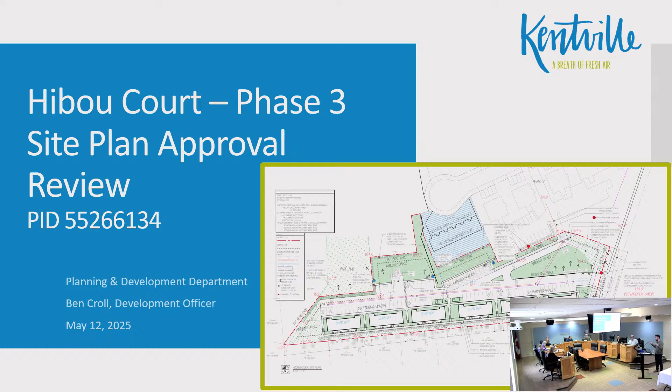Hi, council, mayor, and everyone who attended. A quick introduction, my name is Ben. I'm one of the development officers for the town of Kentville, and I was the one who approved this site plan approval. I'm here to give a presentation on that review process, the regulations, criteria, and everything that allowed me to say yes. There was a report that I created as well that is much more detailed than what this presentation will be, so I do resort to that report a little bit in this presentation. But by the end of this presentation, you should still have an overview on why and how I approved this site plan. First and foremost, where is it?

I have it in the dotted thicker border that has phase 3 and the PID. There is no civic address, so that's why only the PID is provided. The subject property, as I'm going to call it, is 2 acres, and it is currently vacant, so there's no building on it, it's not being used. It is zoned medium density, which is the R3 zone.

Surrounding land uses: to the south, it borders all of the houses off of Mountain View, which are R1, and there's that one R2 lot. To the north is the existing Hibou Court development, phase 1 and phase 2. Phase 1 have little arrows, those are the townhouses, and phase 2 were the apartment buildings. So those are the 2 phases, and this is for phase 3. But apart from that, on the other side of Mee Road, since this property fronts Mee Road, there is Charles Road, and there's a couple of multi-unit dwellings on that road, and there's the Kingstec campus as well. So there's quite a few different uses around the property.

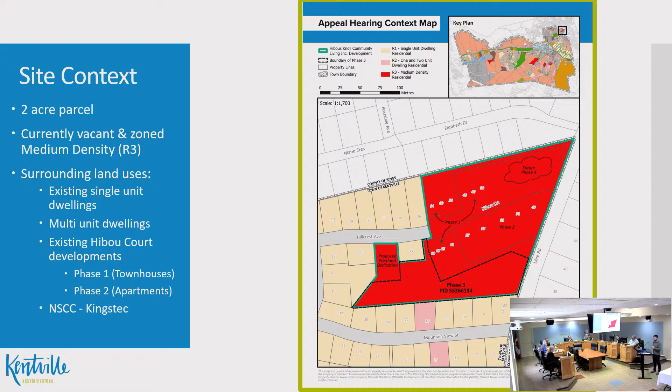The proposal itself, the development, this site plan was to approve 6 8-unit apartment buildings. Each apartment building will be divided in half, so 4 bachelor units and 4 2-bedroom units. In total, we have 48 proposed units, where half, 24, will be bachelor units, and the other half will be 2-bedroom units. This development must proceed through a site plan approval.

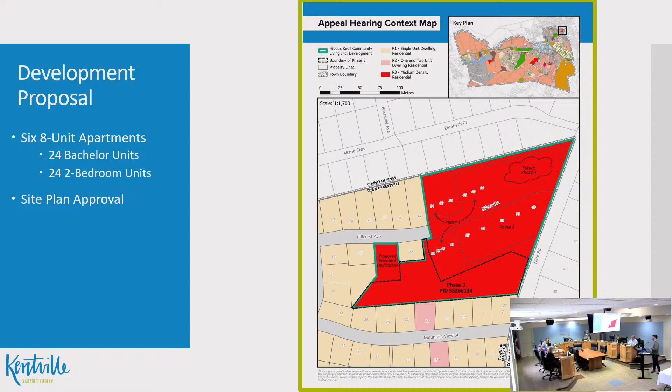However, in order to go into a site plan approval, there needs to be the language and the enabling policy to do so, which is where policy GD30 from the municipal planning strategy comes into play. It reads: it shall be the intention of council to empower the development officer to negotiate a site plan approval as per the MGA for the development or redevelopment of a lot for the following uses. There's A, B, C, and D, but only A applies: new structures in the R3 zone when such developments abut the R1 or R2. And as I showed previously, it does. So therefore, site plan approval.

In the land use bylaw, the LUB, section 5.4.3, in the R3 zone, the following uses shall be permitted by a site plan approval, and B is the one that matters: multi-unit dwellings up to 8 units. That's why it's 6 8-units and not one 48-unit apartment building, because in that zone, you can go only up to 8 units per building.

So there's the where, the what, and how we were able to get into the site plan approval. Now let's go into the review.

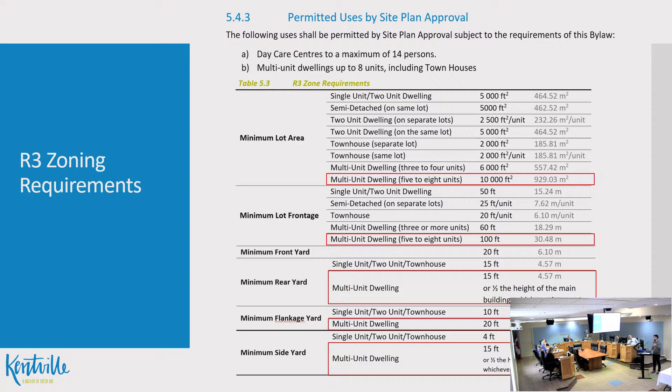First, is it a permitted use? As I just mentioned, multi-unit dwellings up to 8 units through a site plan. Check. So knowing that it's a multi-unit dwelling up to 8 units, then you just need to follow the 8-unit criteria and not the townhouse or single unit criteria. So when reviewing this site plan, we have to make sure that all this complies.

So let's go to the site plan itself. There's a lot here, I'll break it down. But the important thing to know right away is that red line is the property boundary. Further in, there's a gray dotted line, and that is the setback line. Anything within that is the developable land. Anything past, no building can be there. It has to go at least past the setback boundary. That's all I'll say for now, and then we'll dive into the different components here.

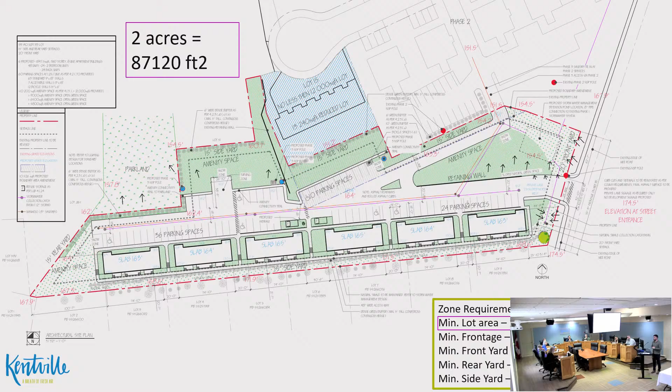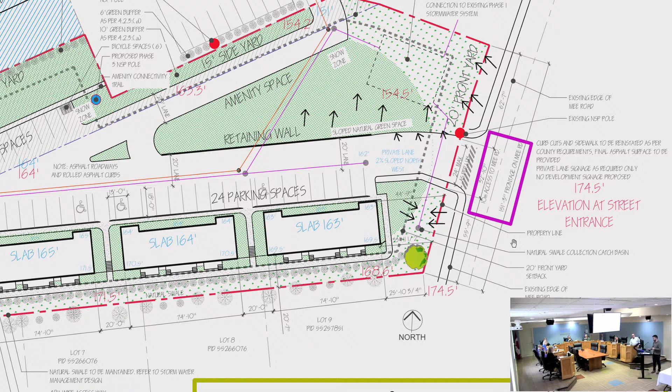So we know it's in the R3 zone, and it has to follow the 8-unit dwelling requirements. For that, we need a lot that is minimally 10,000 square feet. As mentioned, the property is 2 acres, so almost 90,000 square feet. Check. Frontage, that is hard to see, but I learned that you can actually zoom in, which is pretty cool. So 151 right here, and again minimum is 100. So check. Front yard setback.

Front yard setback is, you have to find your frontage. The frontage is off of Mee Road, so 20 feet from that property line. And that is how we got this setback boundary. No building is within that.

Perfect. Rear is the furthest line from your front property line, which is this. The rear yard setback is 15 feet. No building is there, that is met. Every other property line is considered a side property line, so you have another 15-foot setback, and again no building is within that.

So that is the zoning requirements. However, there are other regulations of the land use bylaw that also need to be met. First one, section 4.1.19, this allows more than one main building on the lot. Here we have 6. The requirement is that the minimum distance between the buildings must be a minimum of 20 feet in this case.

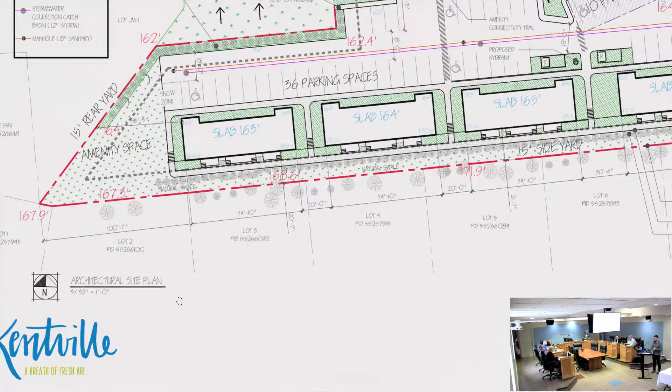So I can zoom in if you want again because it's fun. But here you go, so that's what this 20 foot is. So it clearly indicates on the site plan that that requirement is being met.

Next, amenity space. Whenever a development has 4 or more units, it must meet section 4.1.3. Again, in that report I had more of a breakdown, but in summary, you need 4,800 square feet for the bachelor, 5,400 square feet for the 2 units, so a total minimum of 10,200 square feet. This site plan actually provides more than double that, at 21,000 square feet, which has a little breakdown on the site plan in the top left corner. But all that to say, pretty much everything you see in green is considered amenity space, and it was provided, so check.

Parking. Parking is a bit of a beast on its own, it would take me 30 minutes just to go through all that. So the important item here is understanding the calculation. This is table 4.2 of the land use bylaw, and the second item, multi-unit dwellings that consist of greater than 4 dwelling units, needs 1.25 parking spaces per dwelling unit. There's 48 dwelling units being proposed, so 48 times 1.25 equals 60. Exactly 60 parking spaces are being provided, so check.

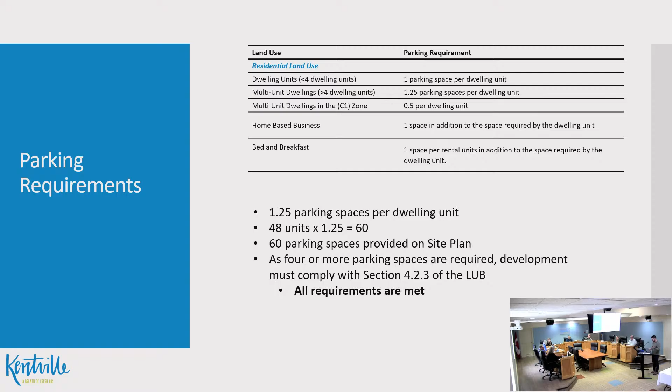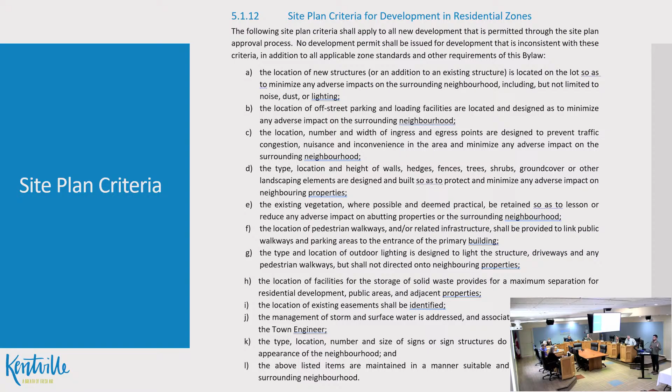So that is the LUB requirements and standards. Now let's go into the site plan criteria.

So the first one: the location of new structures is located on the lot so as to minimize any adverse impacts on the surrounding neighborhood, including but not limited to noise, dust, or lighting.

This is, as a DO, sort of the last one I check, because all the criteria are implemented to reduce the impact on the neighbors. Once you figure all that out, we know the lighting is good, we're dealing with dust, stormwater management, and setbacks. Then I can confidently say all reduction of impact on neighbors is met, and I can approve this. So this is the last one I usually check off.

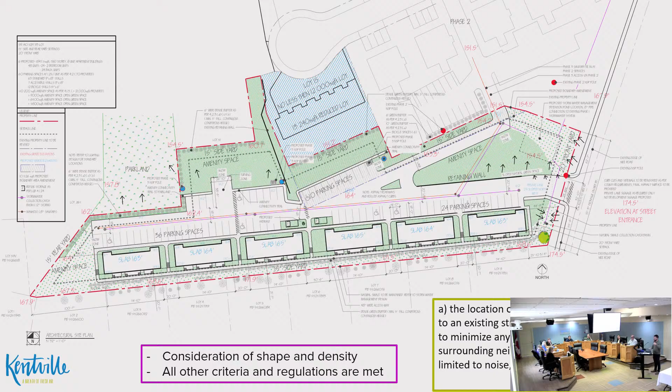However, for the sake of this presentation, considering that the lot is very oddly shaped and it is a medium density zone, so we want to meet that medium density. Considering the shape, the density, and that all other criteria were met, check.

The second one: the location of off-street parking and loading facilities are located and designed so as to minimize any adverse impact on the surrounding neighborhood. This was reviewed with Traffic Authority, and that was attached to the report. There was a memo stating that they reviewed and approved this as well.

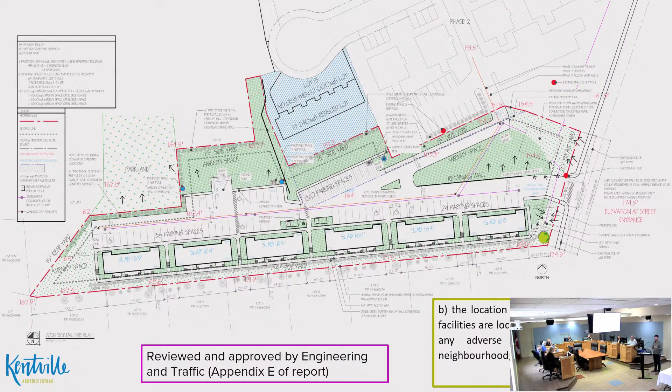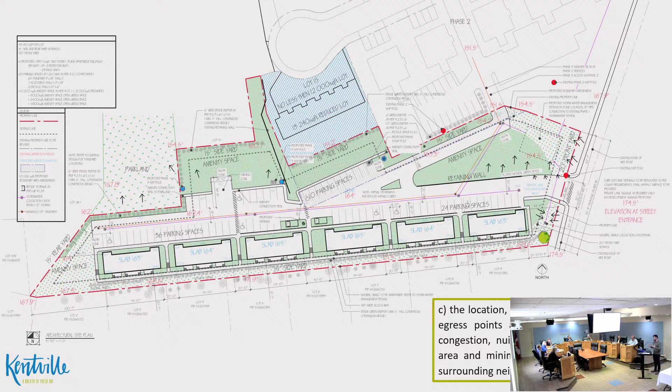Third item: the location, number, and width of ingress and egress points are designed to prevent traffic congestion, nuisance, and inconvenience in the area and minimize any adverse impact on the surrounding neighborhood. Here's an example of one of the different versions. I think there were, I honestly forgot, 4 or 5 different versions.

Ultimately, when the application first came in, the main access was off of Ibu Court, and then there would have been an emergency access off of Mee Road. That did not meet standard, because if there was an emergency, emergency vehicles need quick access. These are going to be rentals, so there will be moving trucks all the time. So we needed a main access off of Mee Road.

Obviously there had been some redesigns, all that stuff. But ultimately, through several conversations with the DO, the different directors, and the applicant -- actually, now that I'm thinking about it, Me Road is a provincial road, it's not within the town. So once we knew we were going to have the main egress off of Mee Road, we actually had to require or get a permit from the province to approve that entrance. That has been issued, so we do have the permit from the province. So with all those conversations, ultimately it was reviewed and approved by traffic.

D, this is buffering -- these are just fancy ways of saying buffering. Another example of a review and different revisions. Towards the end, I'm pleased to show that there is now buffering all along. That was not the case when it was first submitted.

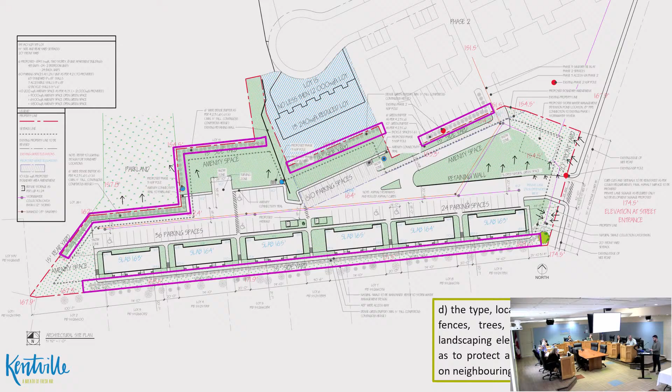So what it came down to is a dense green buffer, and I was very pleased with the word dense, because dense just means that you look at it and you can't really see through it. So whatever combination of shrubs or trees or whatnot, doesn't matter, but as long as it's dense, you look at it and think, okay, yeah, that is blocking light, blocking visual aspects, and that helps with noise and all that as well.

However, that's still not enough, because they can just plant everything, we take a picture, it's like yeah that's dense, but then all the trees die next year -- well that's not really helpful. So we also have the ability to put language in an LOU, a letter of undertaking. A letter of undertaking is the agreement that the town and the applicant will sign, and it's actually registered to the property. So once you look at this property, that letter of undertaking is there, and we will put language in that letter to say that buffer needs to be continuously maintained. You can't just plant it once and let go of it; there has to be a continuous dense green buffer.

There were conversations about putting up a fence and whatnot, but just because of the landscape and all that, the green buffer was the way to go. And of course, nature -- thumbs up.

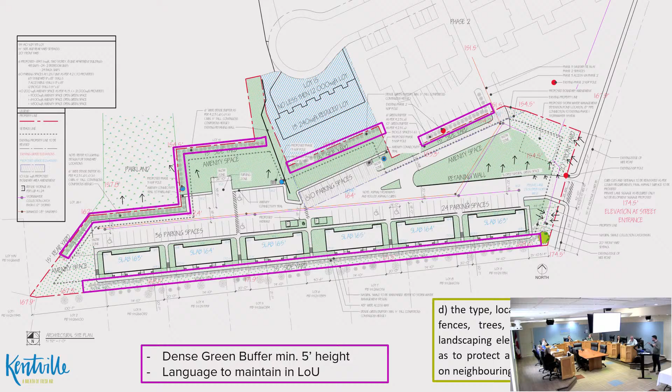Existing vegetation, so it's the same thing. It just says preserve as much as you can. Well, not only are we trying to preserve what's there, but we're enhancing it and fortifying it to provide that buffer. So, check.

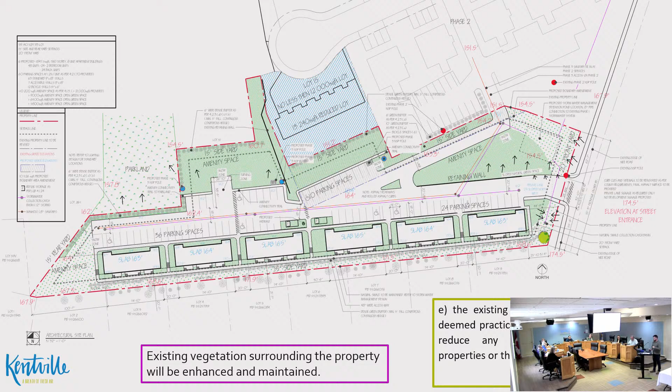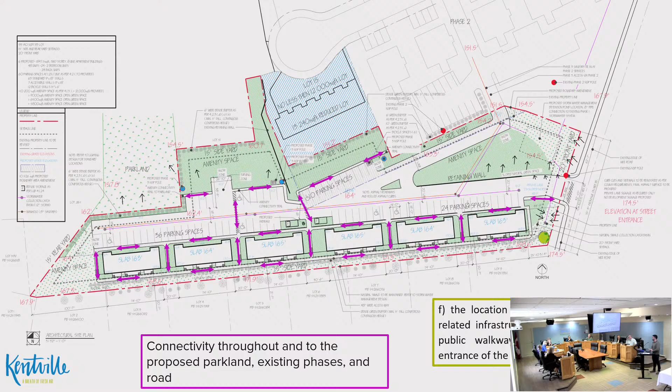Lighting, outdoor lighting. We did request a lighting plan. It was provided, and the plan shows that all buildings and parking lots are illuminated without interfering on or being directed on the neighbors. Check.

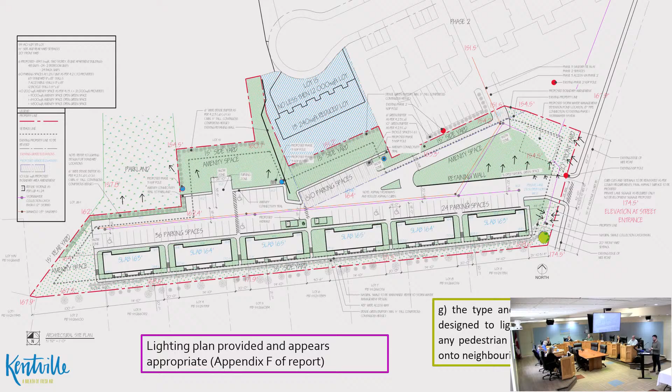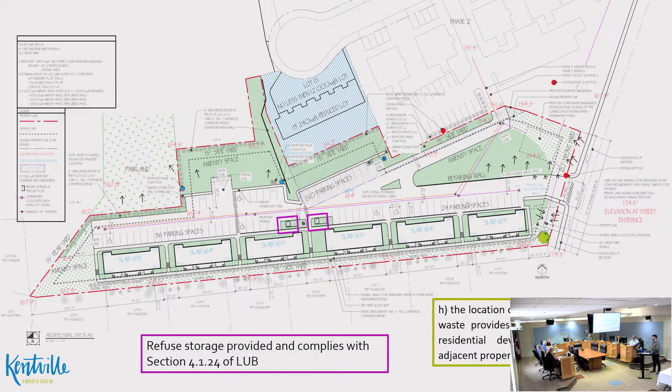Solid waste. Refuse storage has now been provided and is on the site plan. The location makes total sense for the trucks and quick access from the apartment buildings, and it's not next to the amenity where people will be playing. Whenever you provide refuse storage, section 4.1.24 of the land use bylaw applies. Those criteria are met, illustrated in the report I provided.

Easements, no easements on the property, so that was simple. Signs, there's going to be no development signs, so there's not going to be a new one. The only sign required is due to the amount of units — there's going to have to be a lane sign, but that lane sign does not trigger this criteria. So check.

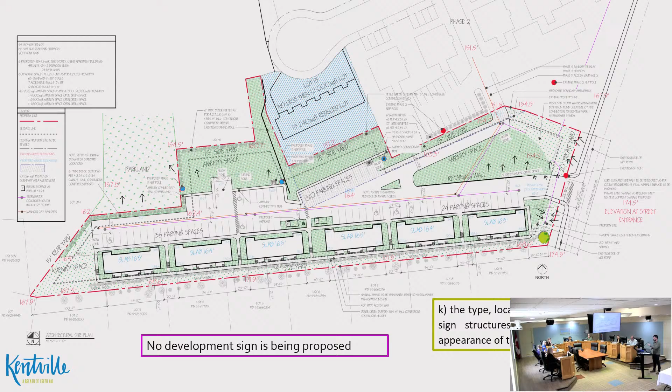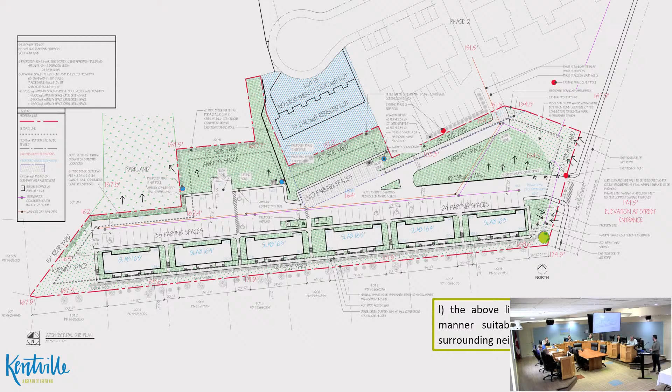Storm and surface water — a stormwater management plan was requested, provided, and reviewed and approved by the town engineer, as noted in the memo. And then lastly, everything was met. The above listed items are maintained in a manner suitable and complementary to the surrounding neighborhood. That's just another way of saying nothing was overseen, everything was looked at in detail and has been met. All criteria are met with no further concerns.

So that, in a nutshell, was the review that I did. I just want to reiterate, I know the mayor just said this in the preamble, but it's my last slide. The application was received on February 6th.

It took about 2 months of negotiations. On April 3rd the DO approved it, and the applicant was notified that day. I attached that approval letter in the report. The very next day we sent out the appeal notice to all property owners within 30 meters. The minimum requirement is 14 days, but we gave 18 days because that was Easter weekend, within that 14 days. So to give a grace period, since people were busy or away, we felt it was only fair to extend it to 18 days and not just the minimum 14.

Within that appeal period, there was one formal appeal. That's why we are here at the appeal hearing on May 12th. As the mayor said, there are 2 options from here: either council approves the DO's decision or they overturn it. I think that's it, so, questions?

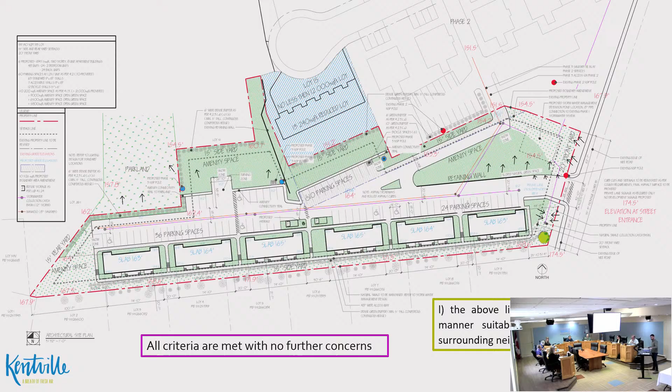My name's Caitlin McKay. I'm the appellant. I'm an audiologist with Nova Scotia Hearing and Speech. I work primarily in pediatrics, and I also am an assistant adjunct instructor with Dalhousie. I've lived on Mountain View for about a year now, and I'd like to object to this under the site plan criteria for development in residential zones.

I feel that the third phase of this development is being designed so that the maximum number of structures is being put in a minimum space, with the maximum number of units per building and the minimum distance from my property and others. Under 5.1.12, the location of new structures must minimize any adverse impacts on the surrounding neighborhood, including but not limited to noise, dust, or lighting, and that has to be under consideration for the shape or density of the property.

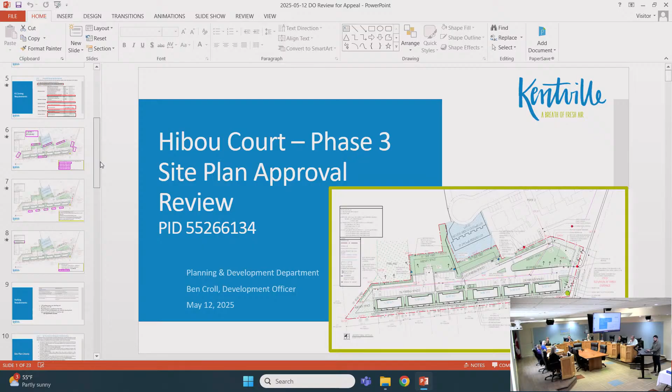And these houses, some of them are built. They were built with a view to the North Mountain, which is now obstructed. Including, I could just speak to my grandparents' house and their neighbors that had giant bay windows at the back of their homes so they could catch that view. Not only is that gone, you're not going to sit in your boxers in your living room any longer if you have someone who appears to be 25 to 50 feet from you. That's not very far when we think in context of even this room.

We may be bound to what we have on paper so far, but anyway, just throw that out there. If you can envision that, 15 feet is not very far, and if anyone cares to, in their own time, take up a viewpoint and look at this, it's pretty close. Anyway, that's my comment. Thank you.

Councillor Savage. Thank you, Mayor. So I've said this before about our land use bylaw and our municipal planning strategy. I think I talked about it when we looked at the Bryson development a few years ago now. These are documents that were looked at in my first term between 2016 and 2020. There have been slight amendments done to them since, but we really do need to look at these two documents as a council, and we really do need to make a plan around what we actually need, what we want to see moving forward.

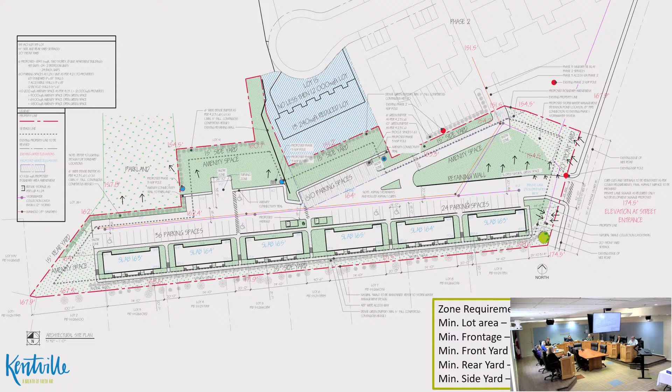There we go. Voting is now open. And voting is now closed, and the motion is carried. Thank you very much.